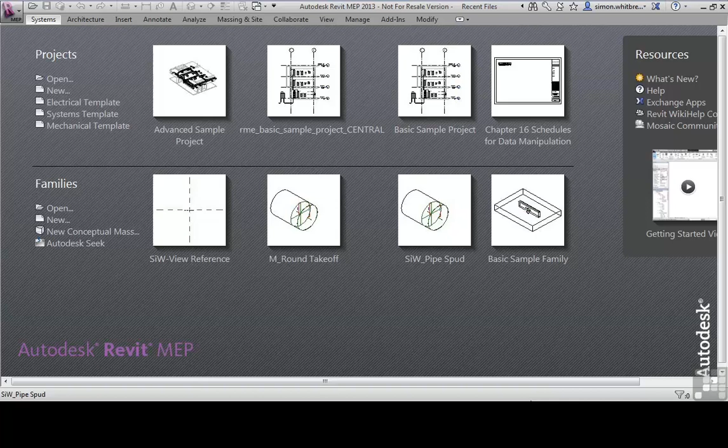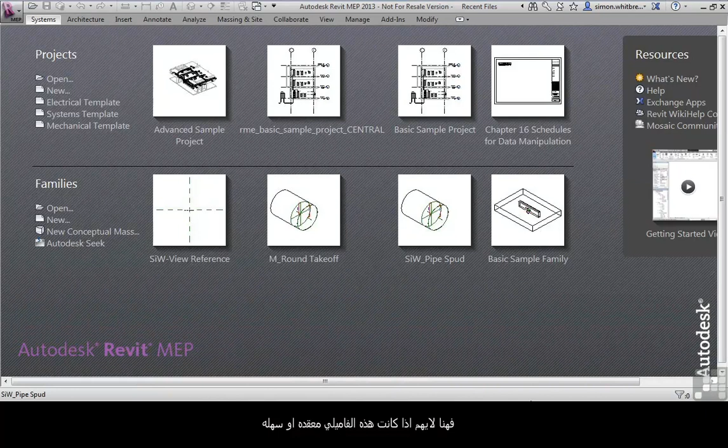When creating a Revit family, template selection is crucial for the successful implementation of a family. This doesn't matter whether the family is complex or really easy.

From your startup screen, click on New Family. Depending on how your system has been set up, you'll get English templates in metric, or you'll get imperial templates. And here we're given a big list of templates to select from.

You can see that these are divided with some additional folders for annotations, for conceptual mass, and for title blocks. These templates are not included in the DVD, as they should be included in your standard install. As you can see here, we have a fairly comprehensive list of family templates. There is at least one notable omission.

Looking down this list, we've got no air terminal template, but it's possible to create an air terminal. We can also see in this list that we've got some items that say line-based, or pattern-based, or ceiling-based, wall-based, or hosted, and some that just have a name.

This is where the template selection is crucial, as once you go down the route of a non-hosted family, you cannot change the family when loaded into your project for a hosted family. And there are going to be projects where you will be using both, possibly even of the same fitting type, although that's not quite recommended.

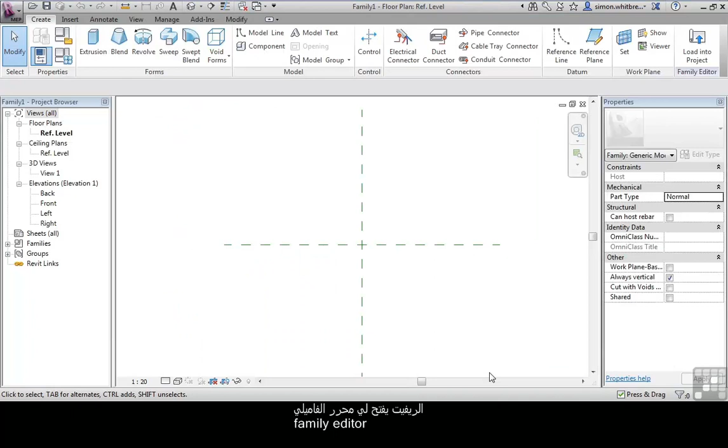Let's take the metric generic model template as an example. At this point, it doesn't matter whether you're using metric or imperial, but I will include both of these templates in the Chapter 6 folder. Click on Open. Revit opens the family editor, and here we can see that the interface has changed.

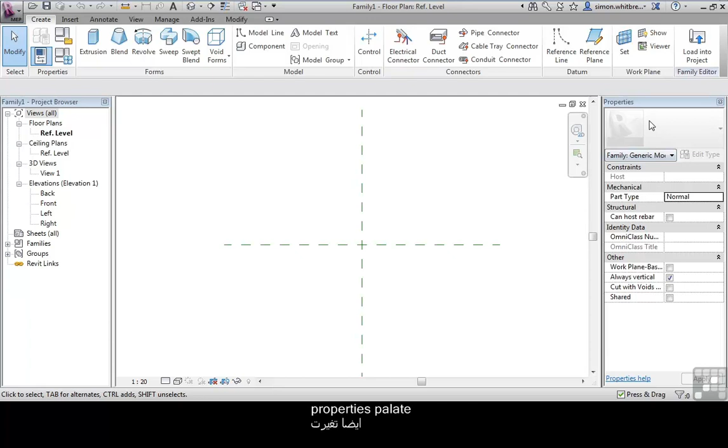The entire ribbon has gone from having a Systems tab to start with to a Create tab. The project browser has also changed. Although we can add views in here, we start with a standard set. The Properties palette has also changed.

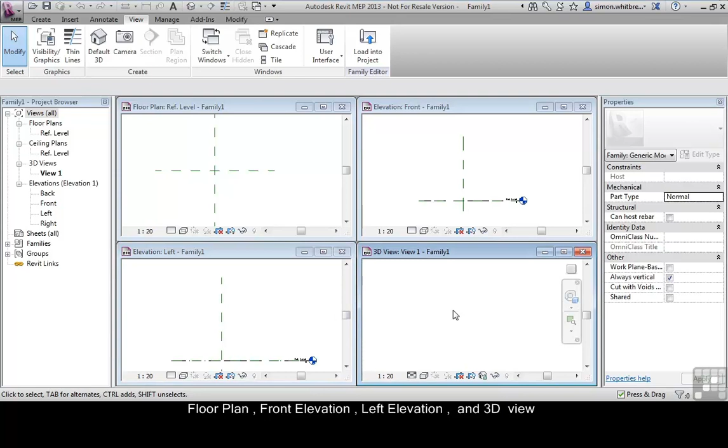The way the templates have been supplied is that if I click on the View tab and go to Tile the Windows, Revit automatically has 4 windows open: the floor plan, the front elevation, the left elevation, and a 3D view. This helps us see our work progress. But back to the category.

Click on the Create tab, and you'll find the Family Category and Parameters button. Here you can see that the category is set to Generic Model. We can also see that on the Properties palette.

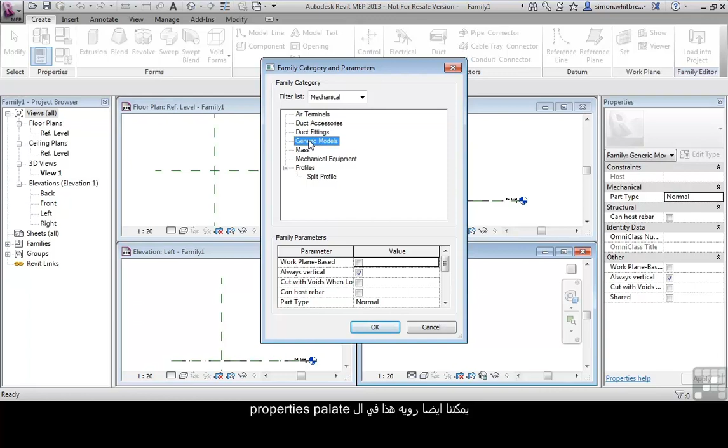And if we want to, we can change the category to Air Terminals. This list isn't comprehensive because of the filter. Ticking all disciplines gives us a list of all the family categories available. So at this point, I can change my family category to Air Terminals.

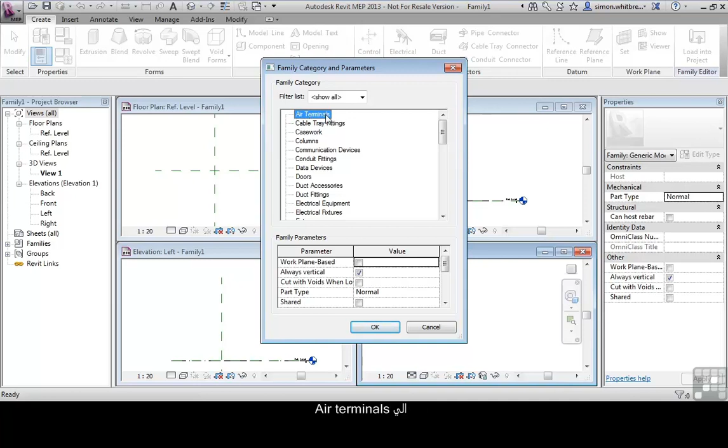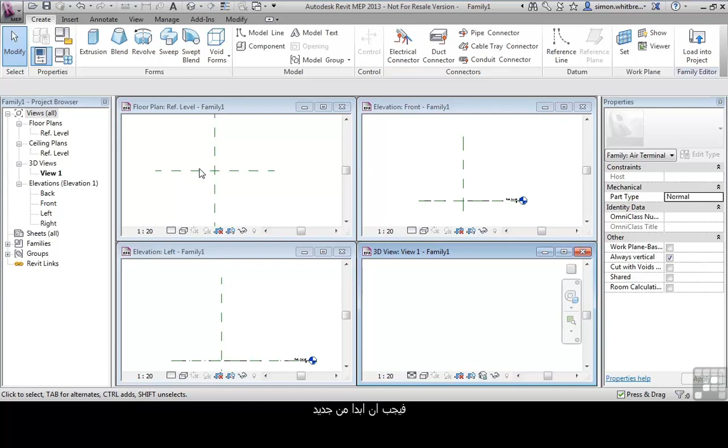Click on OK, and now we have an air terminal family. When this family is saved and loaded into a project, it becomes an air terminal. But remember, this is an unhosted family. If I wanted to have a hosted air terminal family, then I'd have to start again, use the correct hosting generic template, and go through the same process of changing the family category.